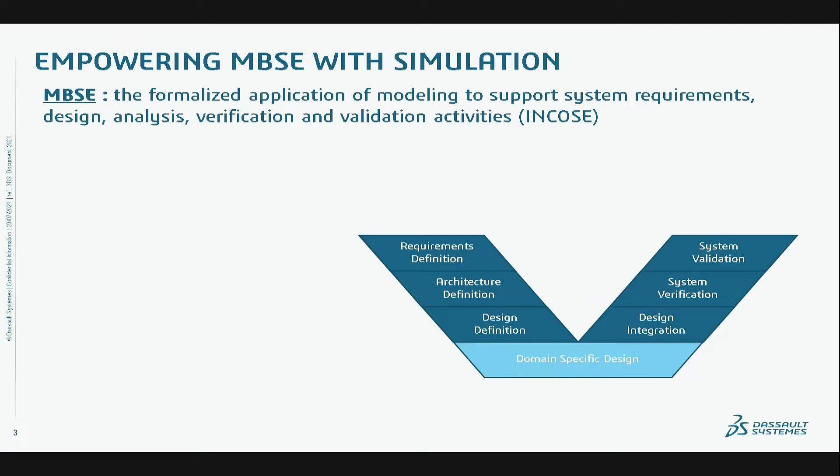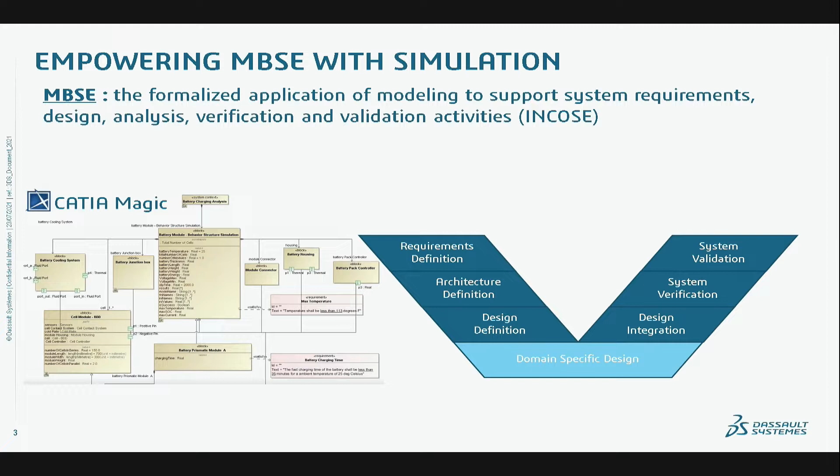CATIA Magic, which some of you may know as Cameo or Magic Draw, is a best-in-class MBSE software suite providing the environment to define the system architecture.

System engineers utilizing MBSE are critical for modeling the system definition, but they can only partially assess the system performance in support of decision making. So the system engineers rely on domain teams who in turn have their own models and simulations that they utilize to generate specialized technical data.

Ad hoc communication and data transmission across these teams can be a source for human error and delays, multiplied via the normal continuous collaboration cycles. Data versioning control across these different levels is also a source for concern.

If we could instead integrate the domain models with the system model, we could be able to directly trace and reduce reliance on ad hoc communication and makeshift data. If that sparks your curiosity, then you guys are in the right room.

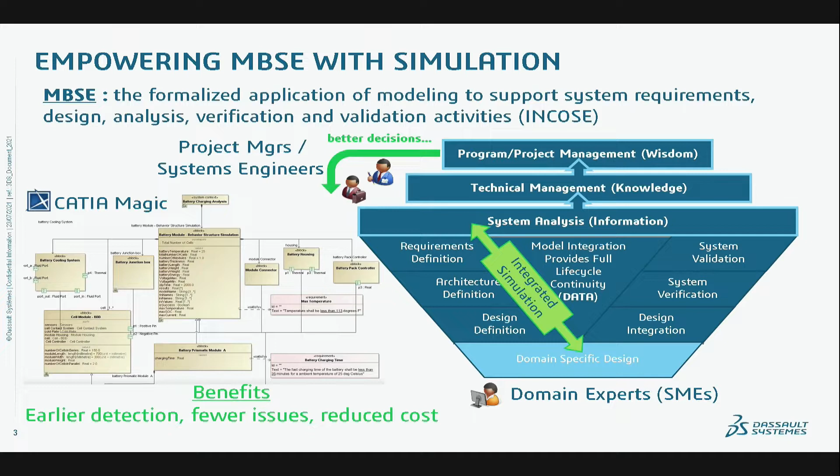All right, so we're excited to share with you today this solution which can empower teams to integrate with the models and processes of other teams.

The first integration that we will cover is from the perspective of systems engineers. We will embed a simulation process into system-level behavioral diagrams, extending the versatility of CATIA Magic simulation.

The second integration that we'll be seeing from the perspective of a domain expert, where we will embed a SysML model into a simulation process, allowing us to directly source the SysML model for simulation parameters.

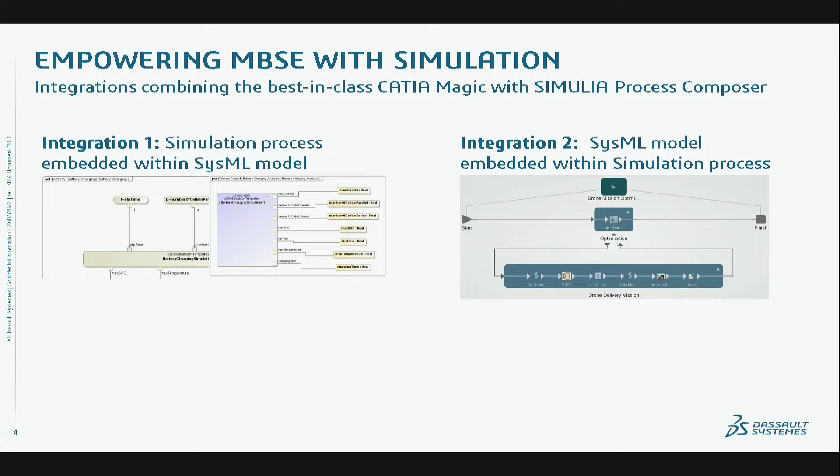Both of these integrations point directly to the models being developed and validated by the authoring teams, which eliminates the effort and potential errors from transcribing or rebuilding. With these integrations, teams can leverage expertise without tying up personnel availability.

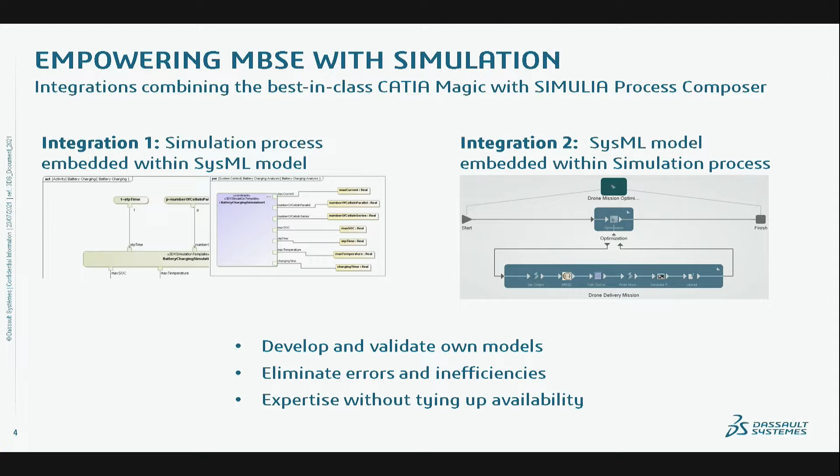All right, so let's see a quick show of hands. Who here knows who Mark Rober is? Anyone? All right, got some hands. Who's familiar with the Porch Pirate glitter bomb? Some more? All right, well, yeah, Mark Rober's the guy who made that.

Yeah, he does a lot of videos, and they're all pretty interesting. And yeah, he sometimes does videos on inventions that he thinks are interesting. And this is one of those videos.

If you're familiar with that, this one's about an autonomous package delivery system. It came out this year, so you might have seen it already. As a disclaimer, we're not sponsored by Mark Rober, we're not sponsored by any of the guys in this video, but we thought it was a really interesting case study. When we saw this video, we immediately started imagining what challenges might exist for an MBSE project like this.

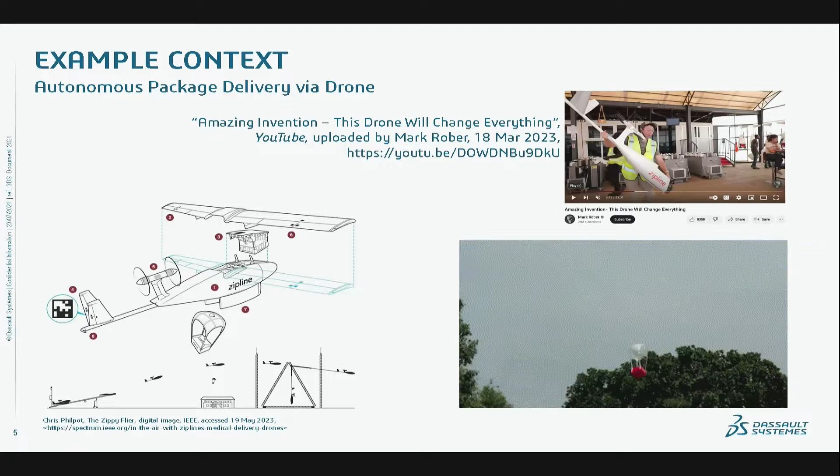That's an autonomous package delivery. The drone itself has numerous subcomponents that will need to be designed, verified, and integrated. And the drone itself is one of a fleet of many drones that are command and controlled, launched, and there's recovery and storage ground systems for that.

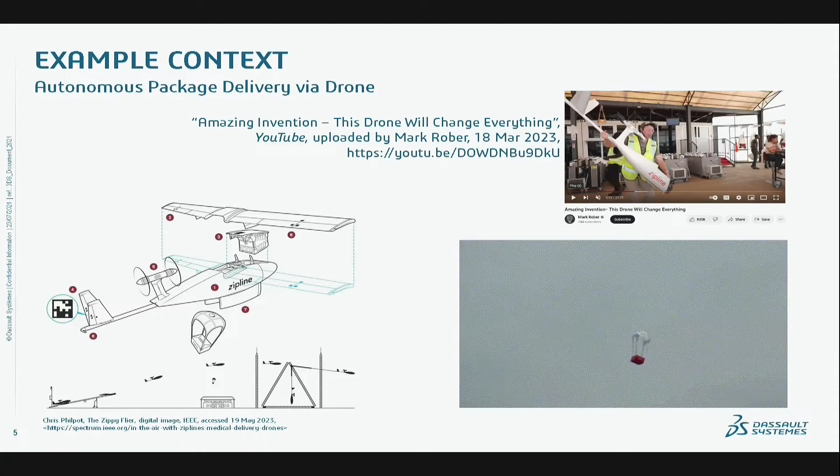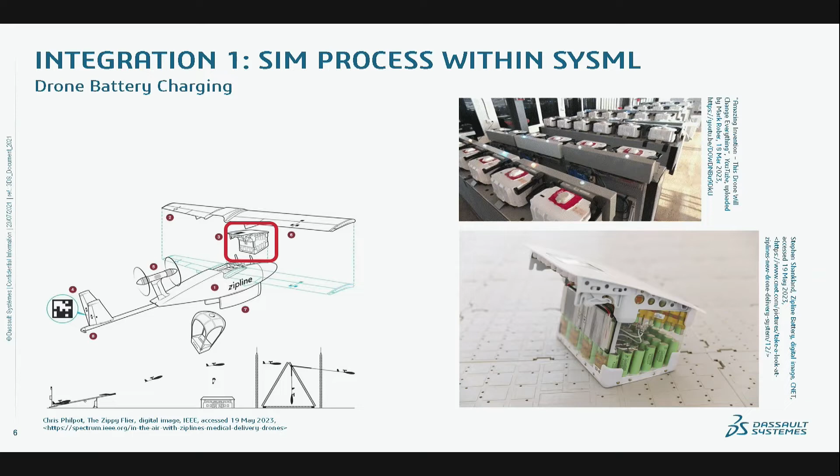The first integration topic, if you recall, will be embedding the simulation process into system-level behavioral diagrams. So the context that we're going to use for that is part of that subcomponent there for the drone, the battery pack, and showing how we can integrate some of these things together. So let's dive in.

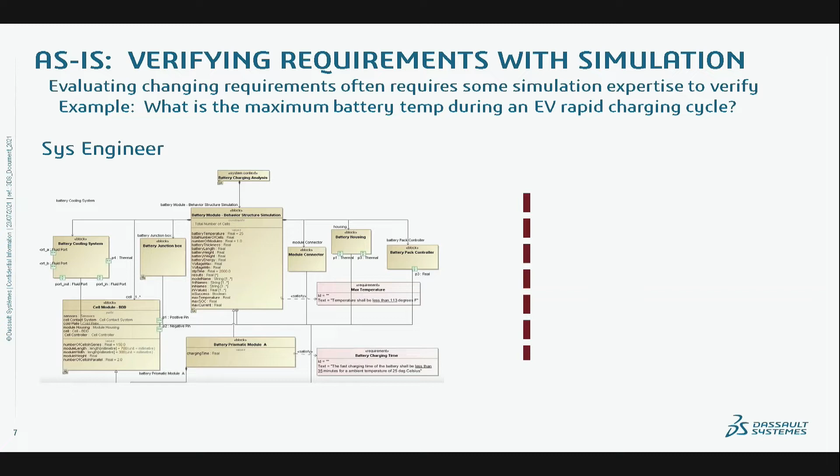All right, on the left, we see an example of a battery module, its components and requirements. The highlighted requirement is for a max temperature.

Since the system engineers are not experts on thermodynamics, they will call, email, or meet with the SME and say, hey, I'm evaluating this requirement against the system. Can you tell me if the requirement can be satisfied?

The SME, in turn, might need to make some phone calls, emails, and have meetings with their teammates and say, hey, I have a battery space allocation model, Bob has the charging controller model, and Sue has the battery cooling simulation. We need to run all of these to get an answer back to the system engineer.

And ultimately, they will communicate back to the system engineer and say, with the values you gave us, you do or you don't meet that requirement.

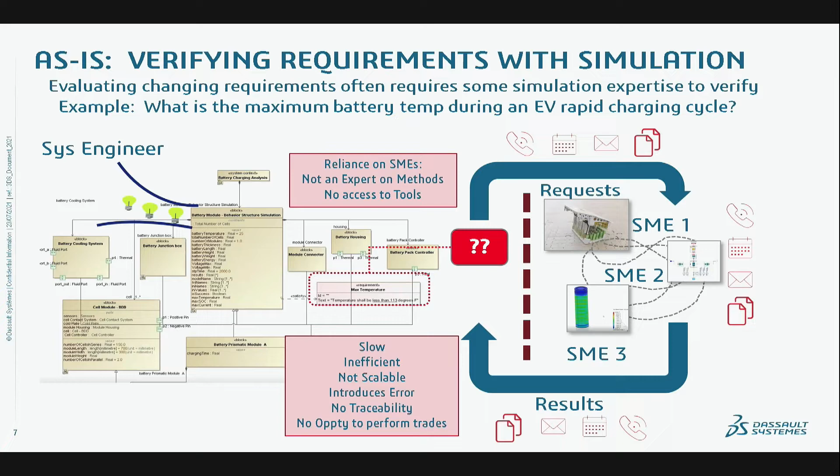This human-in-the-loop process is something that many of you are likely familiar with, and it can be slow, inefficient, and non-scalable. It introduces additional risk of human error, and it lacks data traceability. Furthermore, running this human-in-the-loop process 1,000 times to optimize the system design will have large effects on personnel availability.

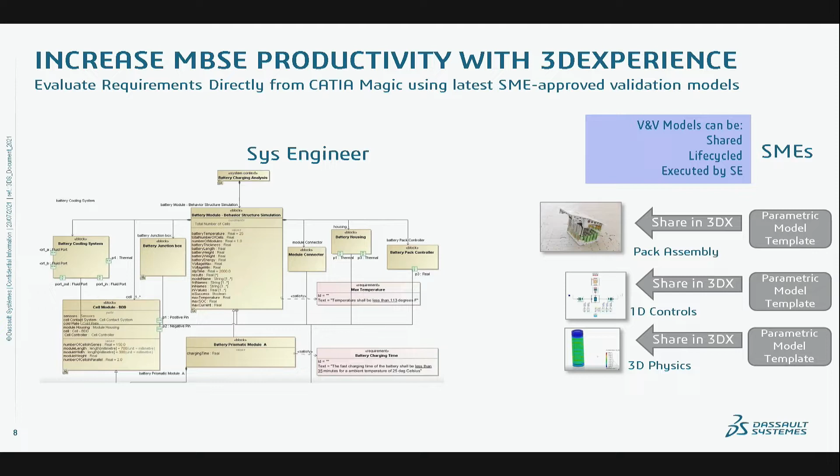We can reduce these risks and increase our productivity by utilizing the 3D experience. SMEs can develop and validate model templates of their simulations at any level of fidelity and share them in 3DX with the system engineers. For this example, the SMEs are sharing the battery space allocation model, the charging controller model, and battery cooling simulation, just as an example. The system engineers can then integrate those templates directly into the SysML model to verify requirements, leading to a decreased reliance on human-in-the-loop processes and greater traceability and scalability.

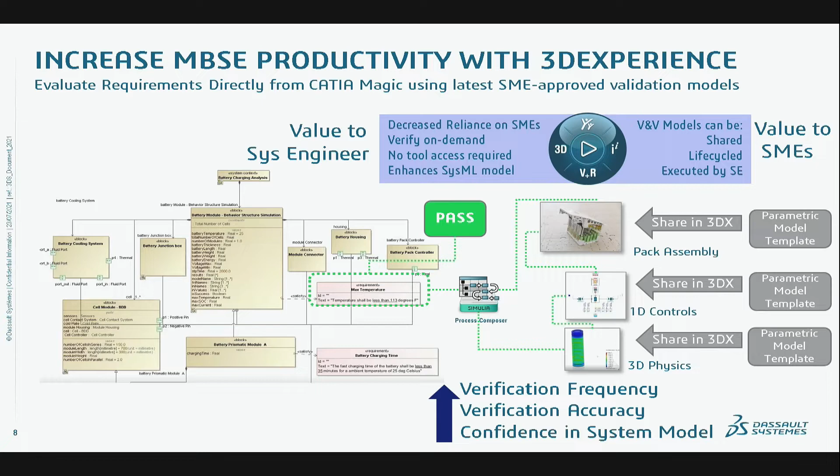So I'll now show you how easily we can seamlessly integrate these together. Let's see if we can get this going.

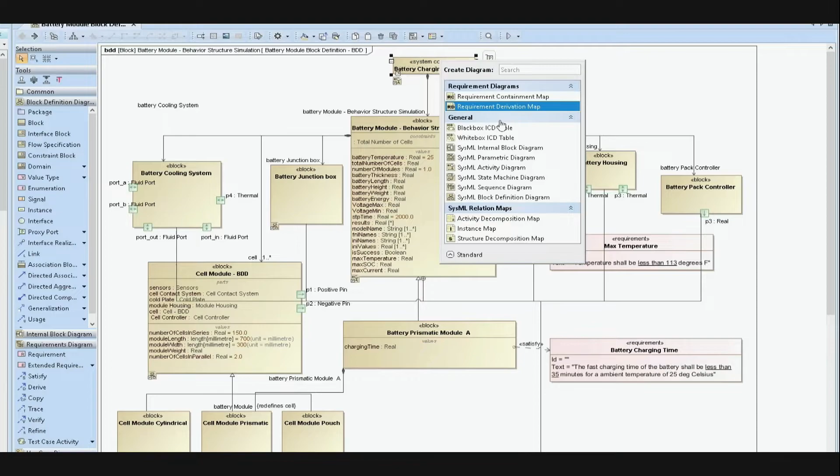This Cameo diagram shows the battery module, its components and requirements, as we saw earlier, the system definition. We will create a parametric diagram where we can simply drag and drop the SME-created simulation templates from the 3DX platform, just on a web browser, and drop those into Cameo.

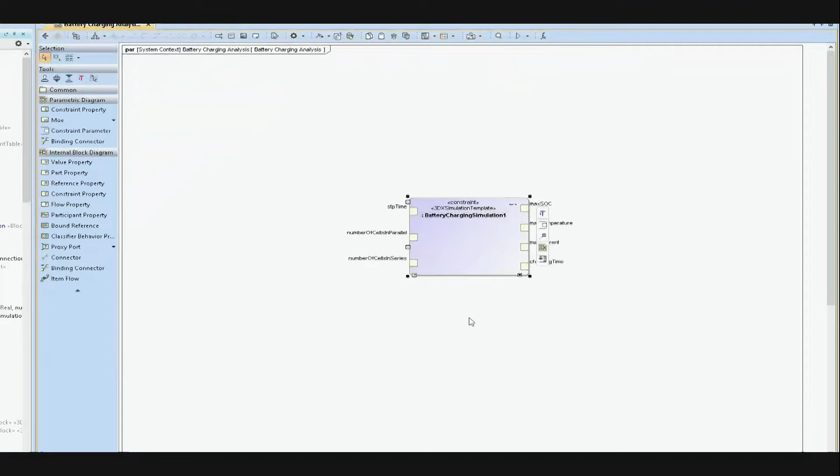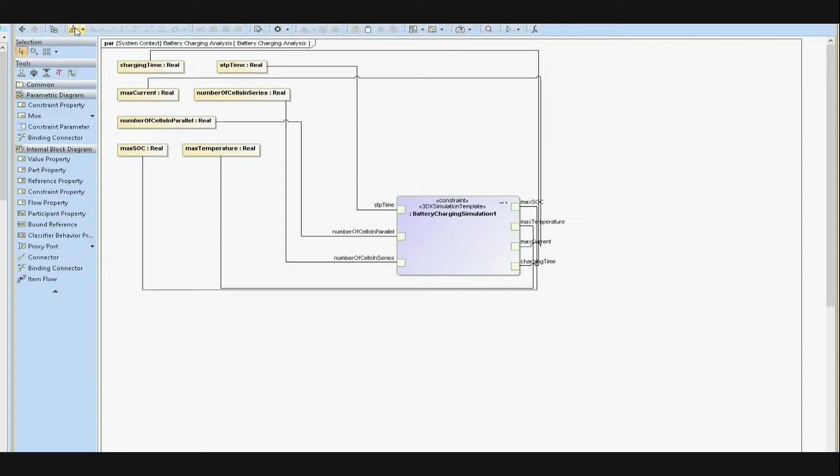Once we do that, you'll see that Cameo automatically reads the input and output parameters, and we connect those associated parameters with the battery system model and the ports of the templates. We'll also utilize the parametric equation wizard, which you might be familiar with in Cameo, that can connect these parameters together, but of course this is manually editable and fully configurable. These connections will ultimately enable us to pass values from the SysML model directly to the template and back.

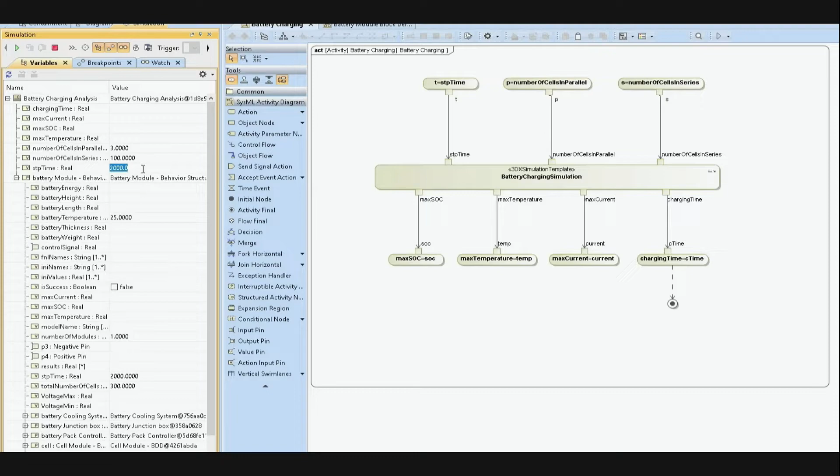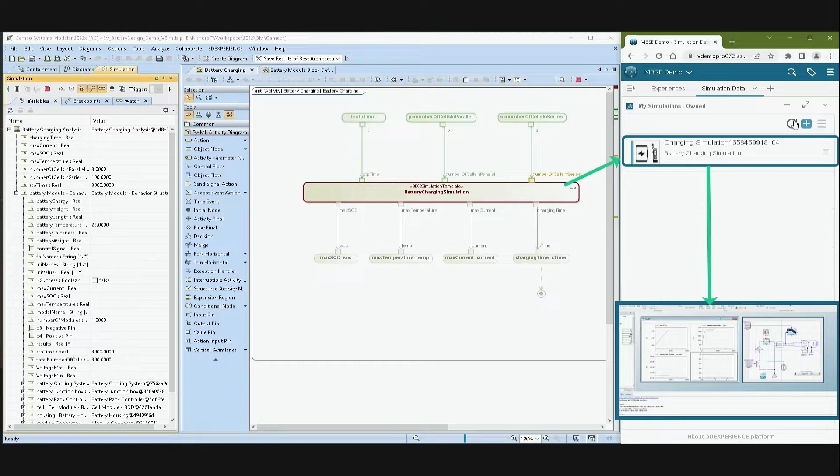When we start the simulation, you'll see that the parameters are read and passed onto the simulation templates, and once the template has those required inputs, it begins executing immediately on the platform and provides an answer back to the Cameo model. Now, to recap, in this example, we want to know if the charging system design can satisfy a max temperature requirement. So once we get the answer back, we'll check to see if that answer meets the requirement. You can see that it's already highlighted in green, meaning that the requirement assigned to it is already being met by this design.

So let's do a quick recap of what you just saw. The system engineers developed a SysML model but needed specialized simulation data from SMEs to verify system viability in meeting a requirement. The SMEs composed and shared simulation templates from their specialized models and simulations, and the system engineers utilized those templates to leverage the subject matter expertise for as many iterations as they need without having to tie up the SME availability. The templates themselves directly document the SME data workflows, and inefficient communication loops have been removed.

To talk a bit more about the in-depth details of the simulation templates, I'm going to pass this off to Kishore. Thanks, Jose.

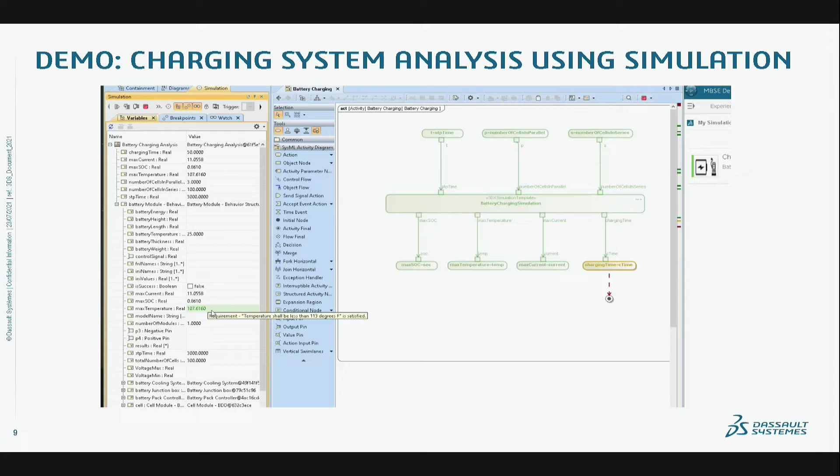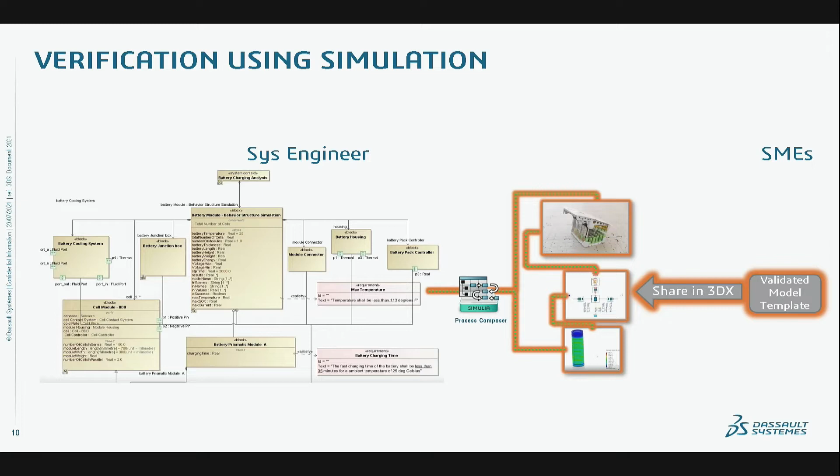All right, so let's go through how... what Jose showed was more from the systems engineer's perspective of how this process is run. But what happened behind the scenes was a subject matter expert first put together that validated model template. We'll take a look at how that process is done.

So first, this SME would develop and validate their models just like they do today in their workflow. They could either use ModSim 3D Experience virtual twins, or they could use their own in-house tools or external tools, and also, as you might be very well aware of, using reduced order models or FMUs to build that.

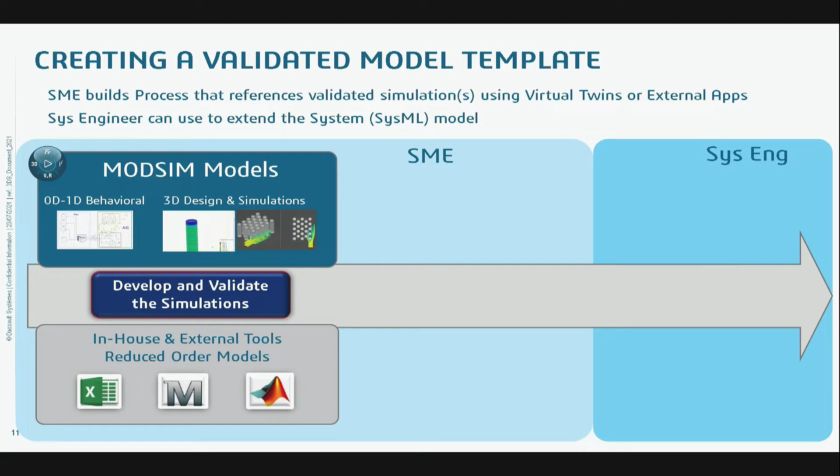Once you have it built, the next step is to compose a process. We will compose either of those tools or a chain of tools into a process, define the data or parameters that will be used and passed by it. Then there will be a small collaborative session with the systems engineer. What this is for is, if you remember Jose's video, what he showed you was dragging and dropping the template from a web browser and then clicking the parametric wizard for it to connect the system parameters automatically with the process parameters.

So there is a little bit of collaboration there to say what inputs and outputs should be exposed for the systems engineer to be able to use this published template. Once that's set up, the SME would create a template, also configured to say where it would be run. You could set it up to run on a remote desktop, the systems engineer's local machine, or even high-performance compute cluster nodes as needed.

Once that's set up, you would make this template available for the systems engineer. The systems engineer, as you saw in that previous video, would drag and drop and add it to his SysML model, making it an executable model for him to run and get the results back.

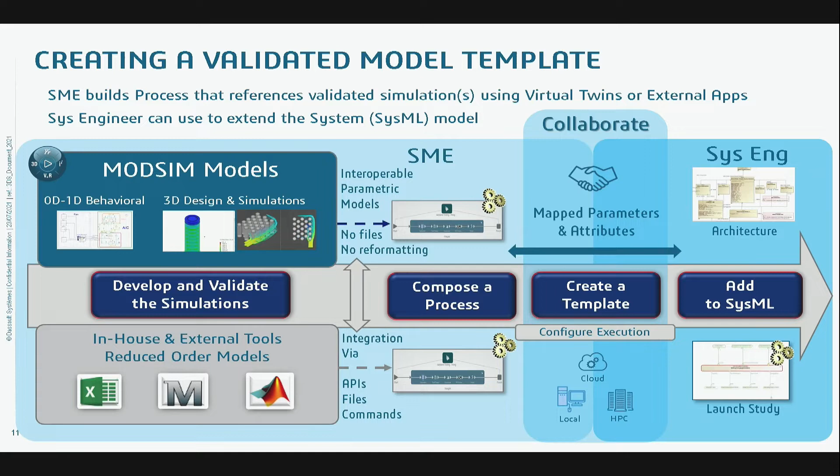Let's look at how the SME put together that process. The tool used here is Process Composer, which provides an easy drag and drop interface. As you'll see in the animated GIF, it's basically dragging and dropping tools, or what's called an activity block, to build the workflow, creating a chain which is either a simple one-step workflow or a series of activities tied together.

To follow a sequential or even more complex branching and parallel running activities. Once that's set up, you would pass information between these different tools using what's called parameters. We'll look at that in detail in a little bit.

And as you can see at the bottom here, Process Composer provides you with a suite of adapters. These adapters represent a step in your workflow - it could be as simple as a pre-processing or data processing step, a small script, a small calculation, or a specific tool that you would launch.

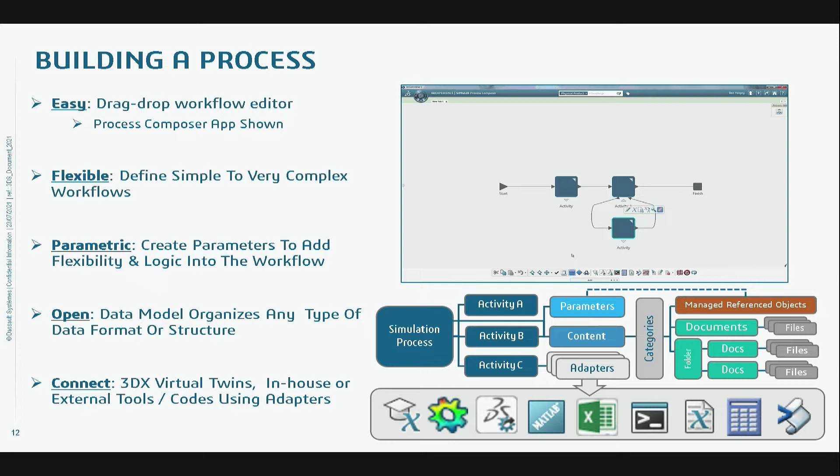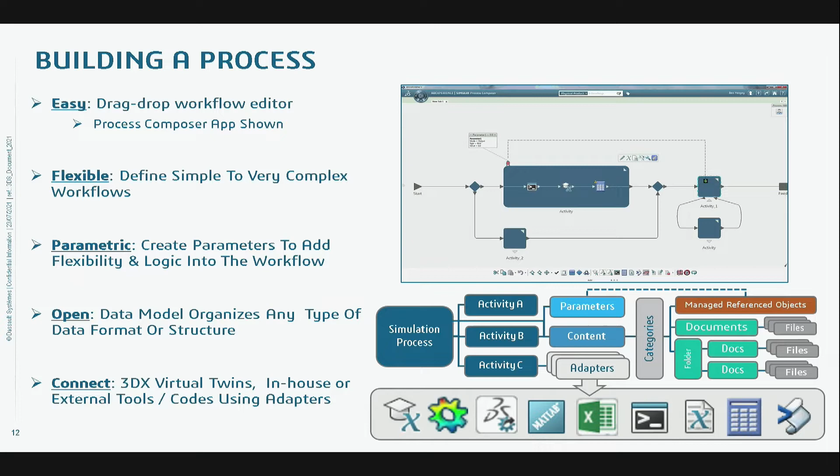So without having to manually code the whole process, you're just using this drag and drop capability to build that workflow. Process Composer has a fully open data model - you could either use 3DX tools themselves, or you could also use your own in-house external tools to build this workflow.

A few slides ago, what Jose showed us was how easily the systems engineer could leverage the SME's expertise captured in that shared model template. Now what we saw was a single run where we estimated the maximum temperature as part of charging the battery of the drone.

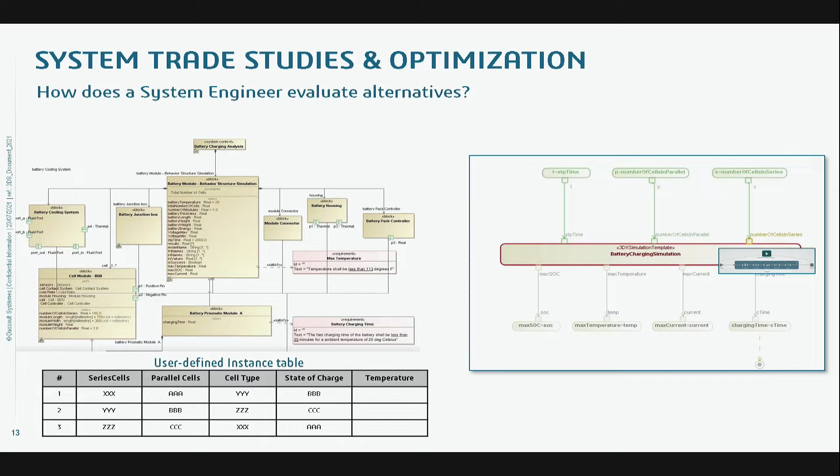Now let's say, what if we want to find the optimal configuration for the max temperature requirement? What if we have competing requirements and want to perform a little trade-off to pick what configuration meets our requirements best? You would typically start in today's system by building a user-defined instance table and running through those to figure out which combination works for you.

The challenge here is this is a tedious process. It's slow, sequential execution, completely ties up your client, and more importantly, doesn't provide you the option to do any optimization or results analysis. So the next question is, how can 3D Experience help you here? Let's send it back to Jose to look at an example, and we'll be back.

All right, thanks, Kishore.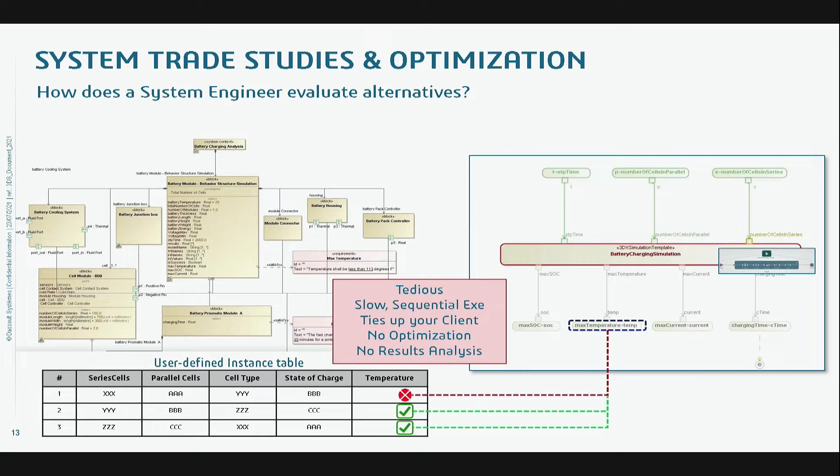As we all know, analysis in the early concept stages is critical for optimizing system design and avoiding costly redesign later. Our second integration demo today will showcase powerful design exploration techniques leveraged to explore that design space and perform data analytics on the results generated with direct inputs from a SysML model.

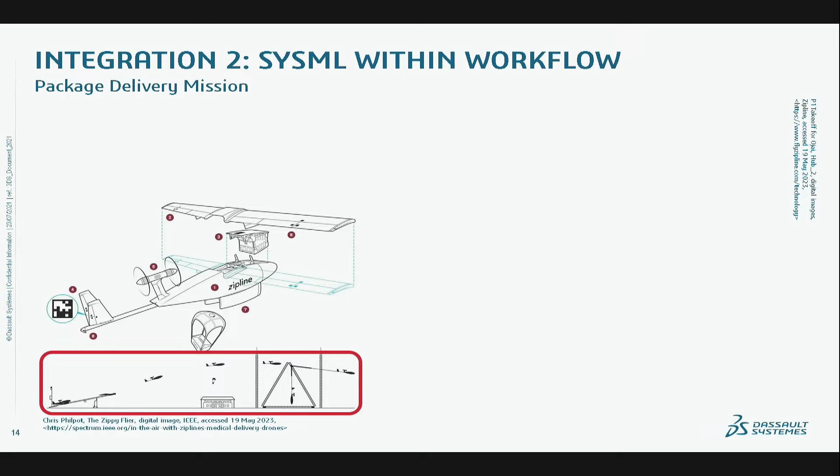Our previous integration example centered on that battery subsystem, but as we mentioned, it's only a small part of a larger system, of which the drone itself - you can see the flight path there - has takeoff stages, flight, delivery, and landing, just for one drone.

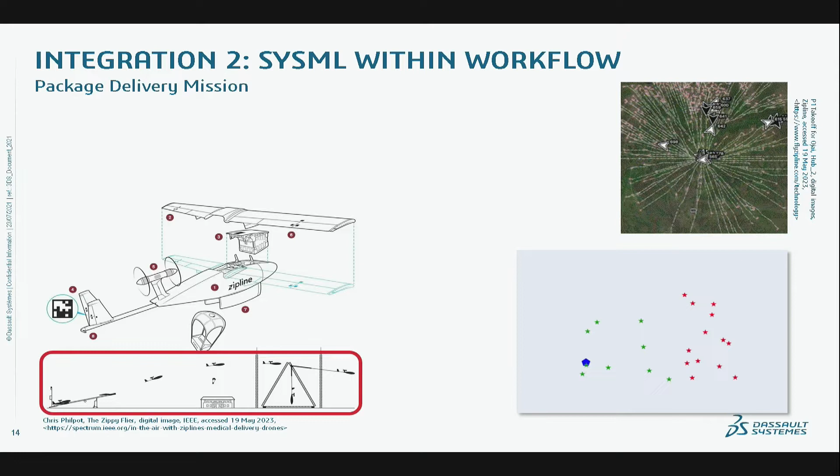And that drone is part of a larger fleet of vehicles managed by your overall package delivery system. Now, an optimization question we want to challenge ourselves with is: what if we're not just trying to optimize one drone, but trying to optimize the whole system in terms of finding the ideal location for a set of geographically distributed potential delivery locations? So that's what we're going to focus on for the second integration.

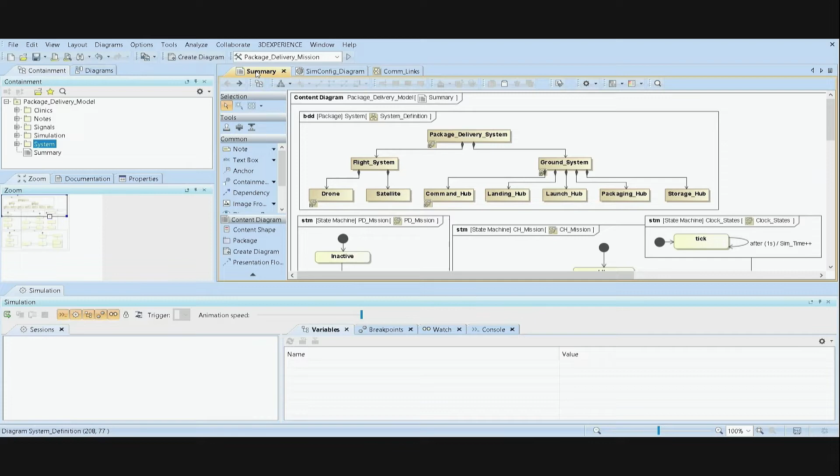And let me tell you, as a modeler, that's a fun challenge - I had fun with it, so I'm glad to walk you guys through this. Let's play the video here. Again, you're likely familiar with CATIA Magic. Here we have a BDD with a simplified view of our system definition.

A particular importance for this will be the drones and the ground system hubs. Now you see the different defined state machine diagrams that capture the behavior and triggers for our system of interest. When simulated, these systems will be activated and will step through the behavior as time progresses by the internal simulation clock. The top left is the overall package delivery system, transitioning to active when the simulation begins.

The top right is the command hub, which checks orders and issues commands to the other systems. The ground system packaging and storage hubs are jointly modeled in the bottom left, where they have the pre-launch and the drone priming states.

And finally, the bottom right defines the drone flight, delivery, landing, and recharging. So, as I mentioned, the command hub element is critical for distributing the signals that issue the controls for the behavior of the other systems. So in this IBD view, we're going to run the simulation and showcase how this runs.

When it first initiates, you'll see that the system check is performed to verify if all the systems are ready to go. Once they are, once an order comes in, the command hub will ping its fleet of drones to see which one's available for takeoff. Drone 1 is responding and it's available, so the order will be assigned to it.

We then see that the system goes into pre-launch and priming states, after which the drone itself is launched and goes into cruise mode. That then updates the order status to say it's processed and out for delivery. You can see there in the order status on the bottom right. We'll go through this iteration for a couple of these orders.

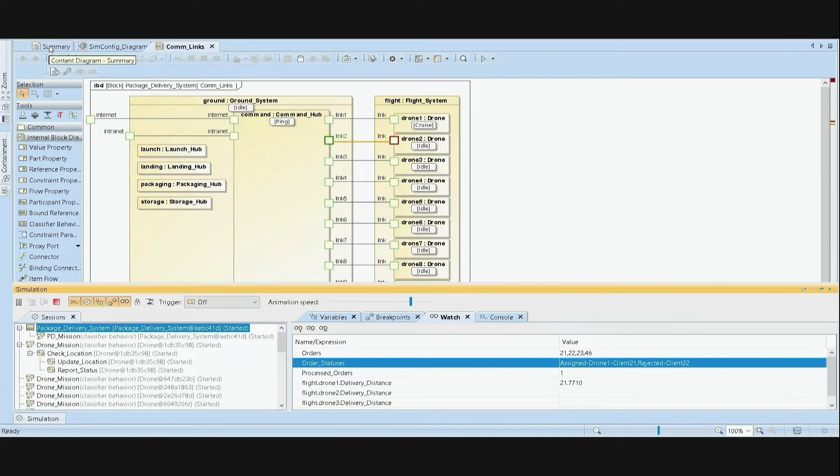Drone 1 is already flying, so it's not available. It'll go next to drone 2 to see if it's available, and it's good to go, it's charged, and the order will be assigned to it.

Now the packaging hub will start preparing the package and load it onto the drone. The drone's loaded onto its launch catapult, the wings are attached, the battery's attached, and the nose cone is put on there, and it's getting ready to go. Then drone 2 is launched, and it goes off to deliver its package.

Coming back to the state machine diagram view, you can see that these are still executing depending on what's happening. The command hub there is assigning the next order, and this time it'll assign to drone 3 because drone 1 and 2 are already assigned to an order.

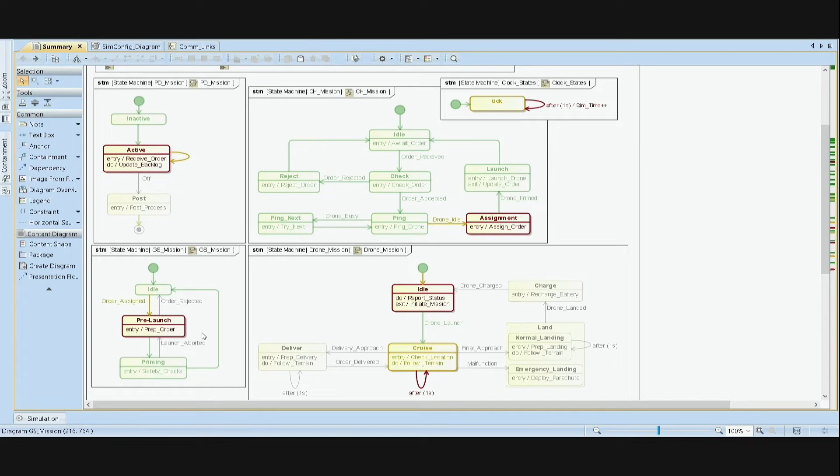So the pre-launch stage there at the bottom left is preparing that order, finding that inventory, again loading it onto the drone, prepping that drone for launch, putting it on the launch pad there, while the bottom right has the state machines of drone 1 as it continues to cruise toward its delivery location.

We see that drone 3 there has taken off, and it actually has the shortest distance, so it's got a nearby order, and it will complete its delivery before the other ones.

So we're going to speed up the simulation as it runs through, and we will see that once it arrives at its location, it will go through its delivery states. On the top right, you'll see that it goes over, drops the package, which is parachuted down to its delivery location, and then it will return back to base.

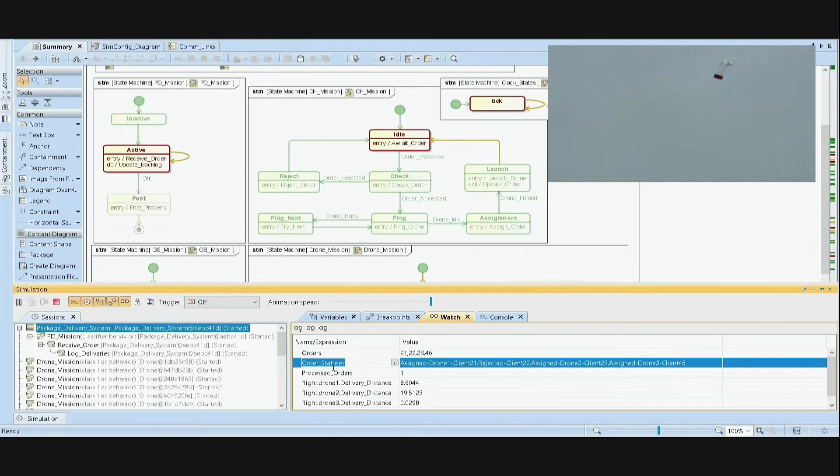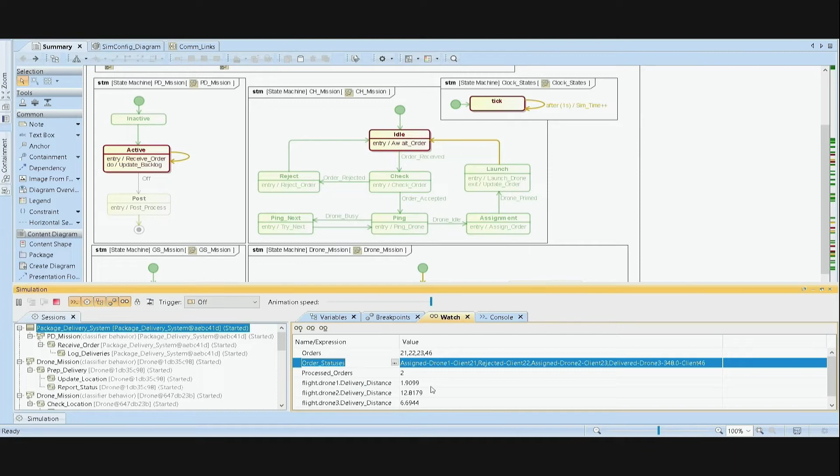So you can see that the delivery distance is now increasing again because it's going away from that delivery location and headed back towards its hub. Once all of this is done, you can see that all our order statuses there are being updated, and drone 3 will now soon reach back to base. I think it was 9.6 kilometers.

So you see that a tail hook for this specific example catches it. Once it's stopped, the ground crew comes, takes off the nose cone and the wings, puts it back into storage, and sets the battery to be recharged and put into the next iteration.

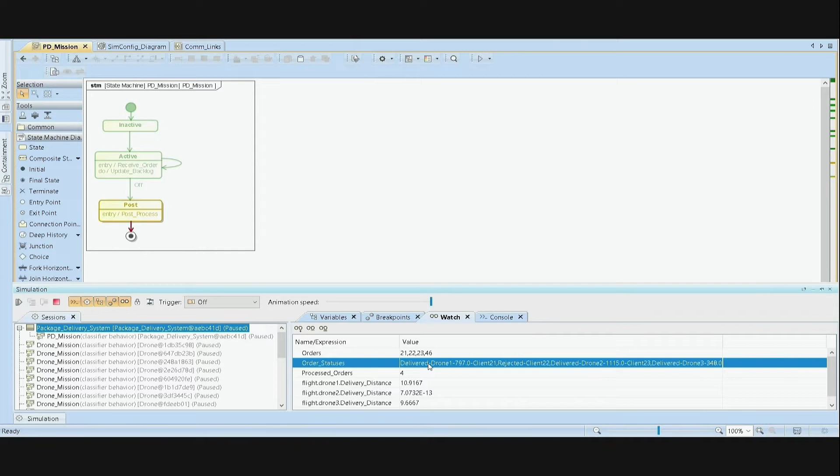So this is the basic idea, again, of the modeling of what it would take to capture the mission performance of this overall package delivery system. At the end of this simulation, we see which orders were delivered, which were rejected, and importantly, what was the timing of those orders.

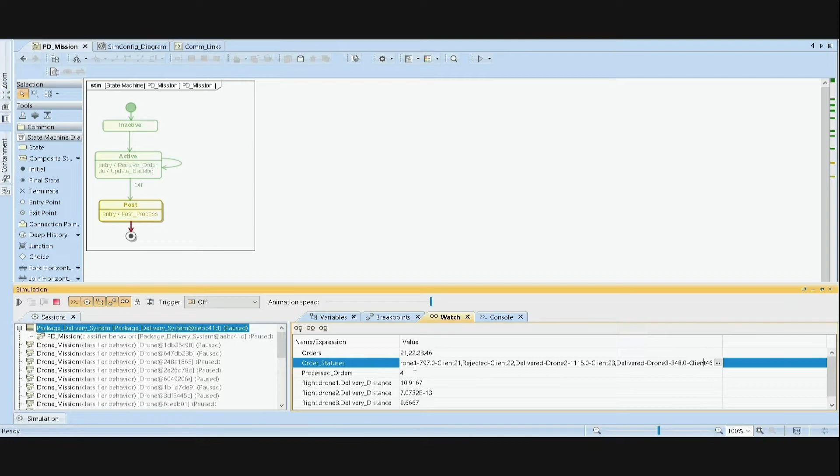So from my perspective, again, this was fun to build, and I'll pass it off to Kishore, and he can talk more about how you can leverage this type of mission simulation and optimization.

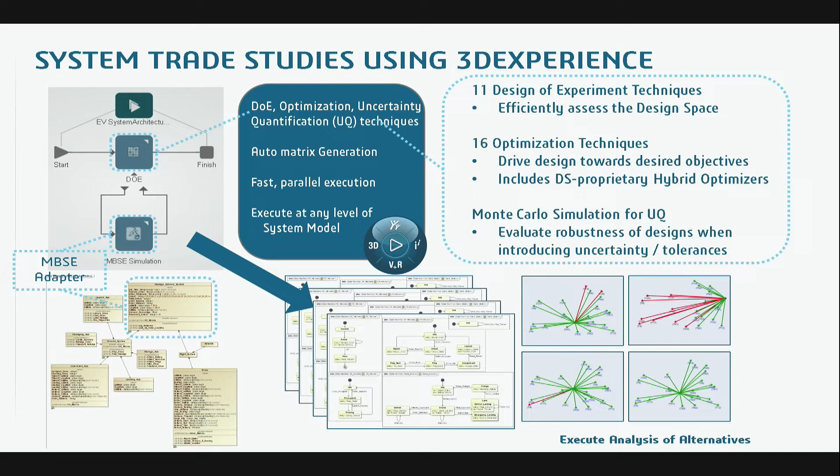What are we going to do with this data? How do we figure out which of these data points or alternatives is going to work out best for us? To do that, we bring in Results Analytics.

Results Analytics, again, is a web-based tool. So just like how you saw the systems engineering was leveraging the SME's knowledge just by using the browser, right? There is no additional tool required. You use the browser to find the simulation template, drag and drop that into your system model. Similarly, again, a web-based tool for you to bring in all this data. And Results Analytics lets you manage that data set and perform trade-offs with rich visualization capabilities to pick which of these alternatives, the design configurations that you have generated, meets your requirements the best.

To talk a little bit more about Results Analytics, it is the decision support tool, as I would like to call it. It collects all your analysis data sets to visualize and study to understand which works out best for you, ranks and scores these alternatives depending on the inputs that you provide, and lets you compare the performance KPIs of these designs in a single view in a side-by-side fashion. It also provides visualization capabilities for you to quickly narrow down on what will meet your requirement.

A couple of things which we are not going to show in this demo, but I would like to highlight: if you were to start working with requirements, Results Analytics has the capability to read in requirements to sort and rank these data sets, and essentially feed your learnings back into the requirements. Similarly, as we talked about a little bit earlier, FMUs, or reduced order models, are of great interest. Results Analytics does have the capability to generate and export FMUs from the data sets that's loaded in it.

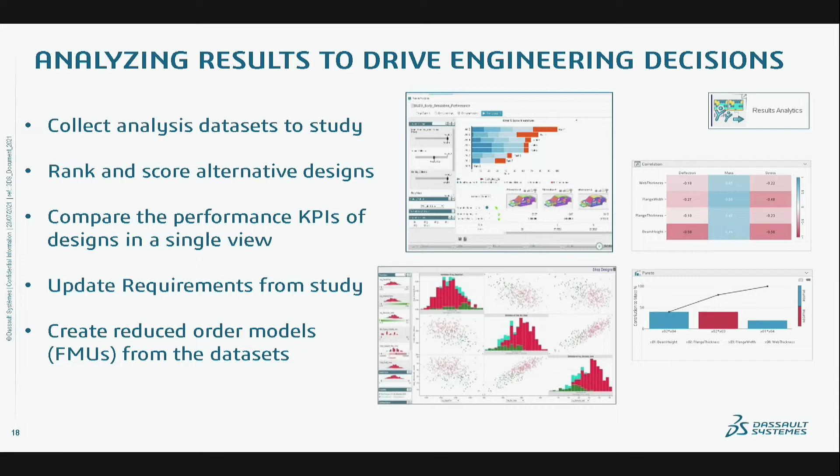Okay, so I have a video here which will look at how this mission model was tied via Process Composer, automated, driven, and we'll look at the results. Let me start playing that now.

Those two are passed in as input, and the system model executes to generate the order status, which, if you remember from his video, was a long string that had the complete information of what all points or targets were successfully delivered, how long it took, and what drone delivered it, and things like that.

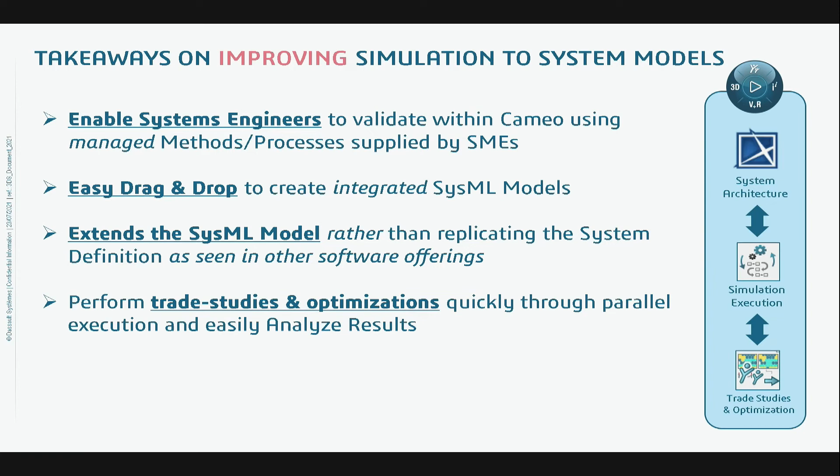That's all we had. Thank you.